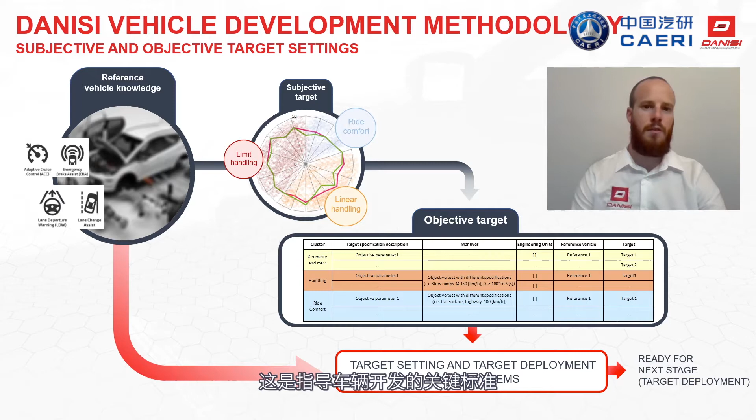A fundamental role is played by our innovative blending methodology. We consider this methodology to be a step forward compared to traditional approaches to simulation and virtual models. In fact, in the past, vehicle models were usually created only after the availability of new vehicle prototypes, leading to the creation of a so-called digital twin. As a consequence, simulation played a very marginal role, especially in the definition of the first prototypes and on very important architectural choices which are usually made very early in the project.

In Danisi Engineering, we worked on our methodology and know-how really in order to be able to build a reliable vehicle model in advance, even during the first prototype design phase. We call this vehicle model a virtual prototype. We can say that in this way, simulation becomes a part of a blending methodology in which all the main parts of our engineering process, you can see summarized in the circle here in the slide, are blended together in order to create prototypes with a higher level of significance.

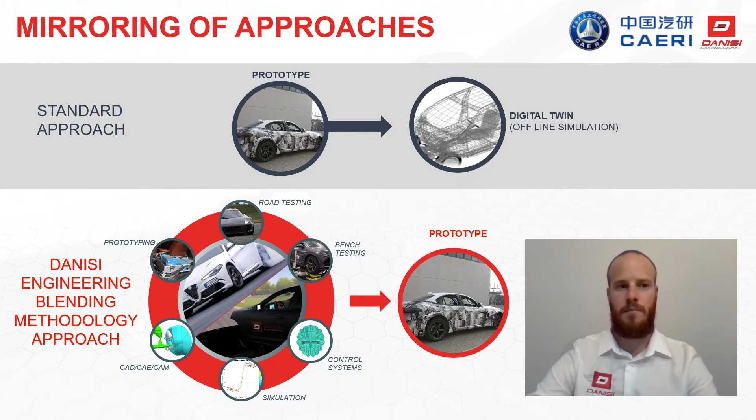The key idea behind this approach is to anticipate part of the development of the new car using simulation and its integration with our other engineering areas. In this way, the prototypes and road testing activities are reduced and especially focused on higher quality activities. This helps in reducing times, cost, and of course at the end obtaining better cars. The availability of a reliable virtual prototype from early stage allows us to focus on subjective and objective targets since the beginning of a project.

Here you can see our development loop in which there is a strong interaction between different engineering areas and all the main vehicle suspension characteristics and vehicle characteristics are integrated into the vehicle model. This allows us to check the target achievement for both objective and subjective parts. A development loop is then required until the targets are achieved.

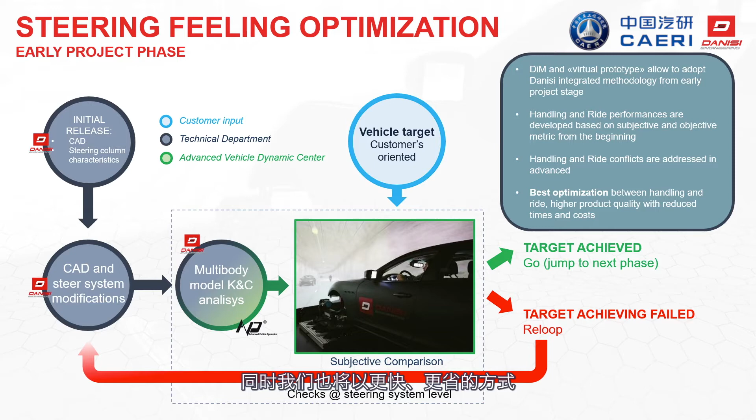And the benefit from this kind of approach is that the vehicle and systems design is driven by vehicle targets since the beginning of the project. Handling and ride conflicts are also addressed really in advance, leading to the best possible optimization between them. At the end, we will have a final vehicle with higher quality and also reduced time and costs.

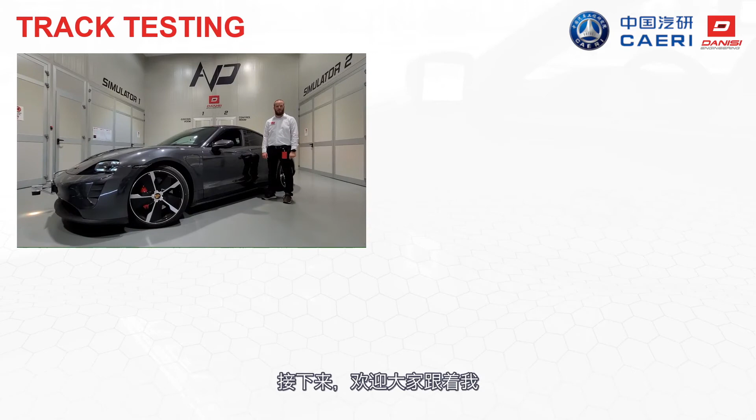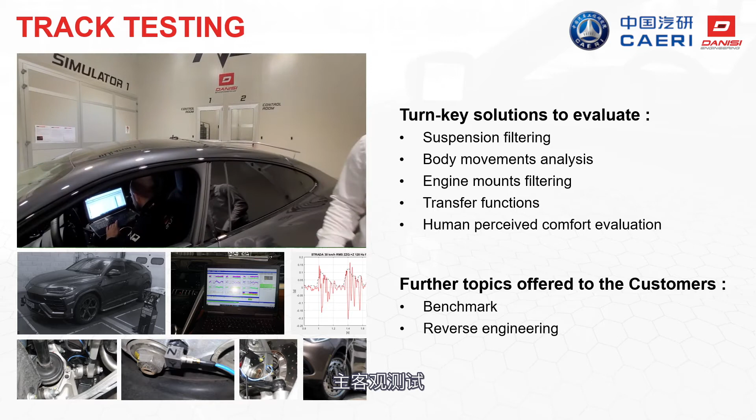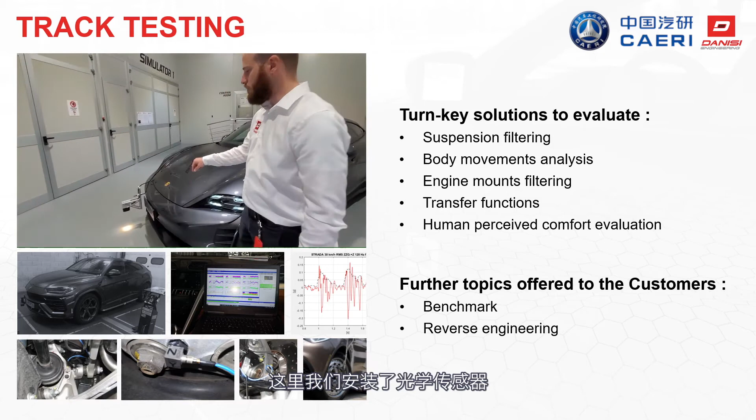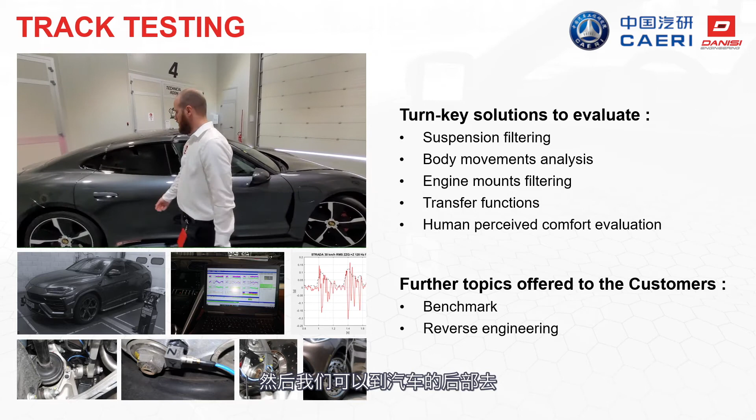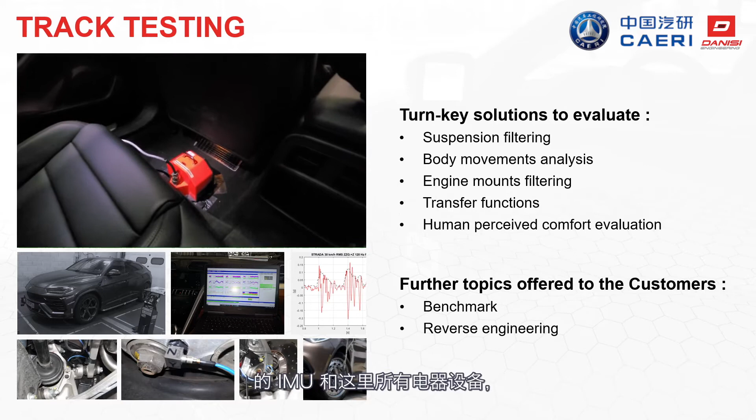Starting from the front of the car, in which we have this optical sensor that is used for measuring side slip angle and vehicle velocities. And then we can go in the back of the car. Here we have the other important pieces of the instrumentation. For example, there you can see an IMU, which is used for accelerations and rotational velocity measurement. And here all the electronics that help us to log all the required channels.

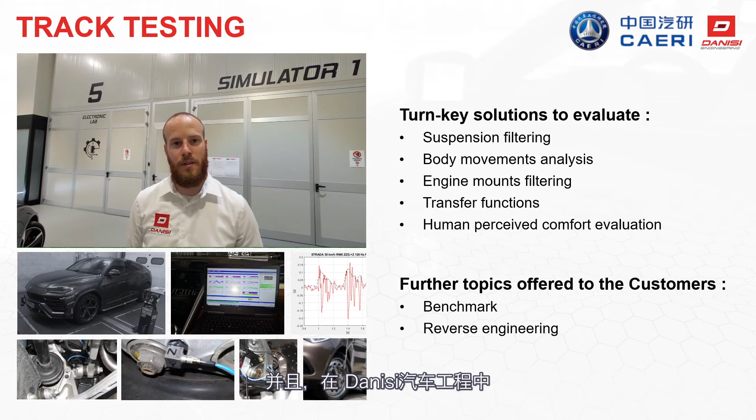The same road testing team is also working on the ride side. So we have a similar sort of instrumentation for measuring all the required channels for objective ride analysis. And also we have the expertise for subjective ride evaluations. In Danisi Engineering, we do ride comfort evaluation using also simulations and driving simulators.

For a trustable result in this topic, we focus on two main pillars that I will illustrate in the following. The first one is related to valid simulation results that are obtained first of all using trustable vehicle models. And in Danisi Engineering, we use a variety of vehicle models, starting from the first model in early project phase to the most advanced ones, like multi-body models.

We also validate the vehicle models both for handling and ride comfort evaluation, which is of course really important. Another important aspect is related to the tire model, that for ride simulations is especially important. And the tire model should be accurate for this kind of evaluation. A simple handling tire model is not enough.

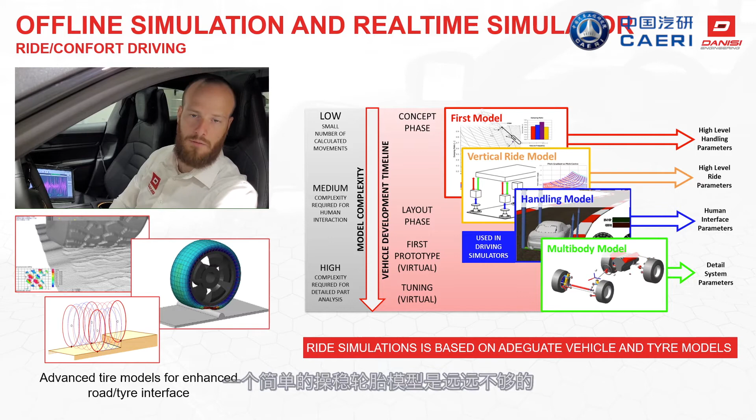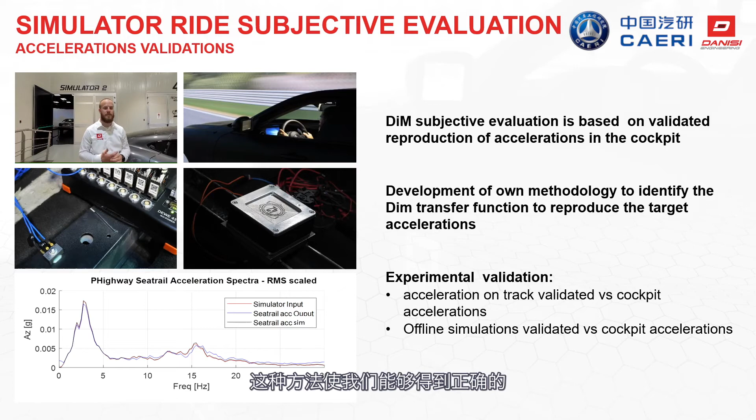The other important pillar for ride simulation is to have validated acceleration on the cockpit of the driving simulator. In Danisi Engineering, we developed a methodology for reaching such a goal. As you can see from the pictures here, we conducted a measurement campaign in which we mounted accelerometers on specific points of the cockpit. Then, thanks to our methodology, we validated the accelerations in these points against simulation results and track measurements. This methodology allows us to compensate for the DIM and cockpit transfer function.

When dealing with subjective handling evaluation on a driving simulator, our attention goes to making sure that the dynamic simulator reproduces in the, let's say, best possible way the vehicle dynamics. We achieve this goal by using a strong approach to motion cueing tuning. The motion cueing, in a dynamic simulator, is the algorithm that controls the motion of the dynamic platform as a function of the simulated motion of the vehicle model.

Here in Danisi Engineering, since the installation of our team in 2016, we worked on building an approach that gave us comparable subjective evaluation for the same vehicle, both driven on the simulator and in the physical world. We validated this method on several vehicles, of which we had both the physical car and the virtual model. Thanks to this approach, we are now able to apply our motion cueing tuning process very early, even before the start of the physical prototype design phase, ensuring in this way that subjective evaluations on the DIM of virtual mules are trustworthy.

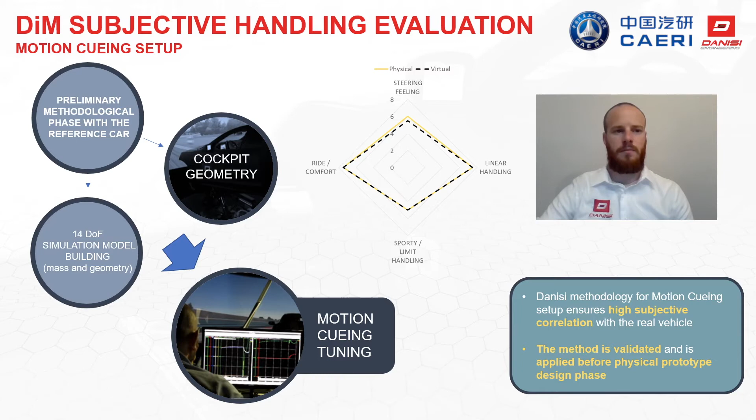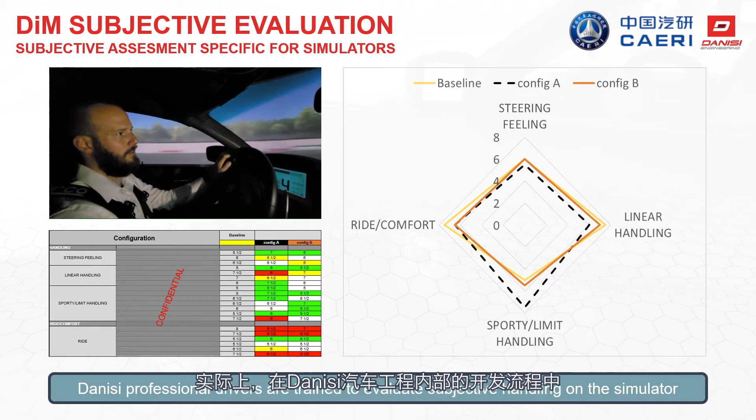The other important point when dealing with subjective feeling on driving simulators is the driver itself. In fact, the approach should be a little bit different compared to physical world testing. In Danisi Engineering, we developed a standard approach for the so-called adaptation phase. This makes us sure that the subjective evaluation that our professional drivers give us on the driving simulators is correlated to the one that they give in physical world testing. We also suggest this adaptation phase to all new customer drivers that are coming to visit us here in AVD Center.

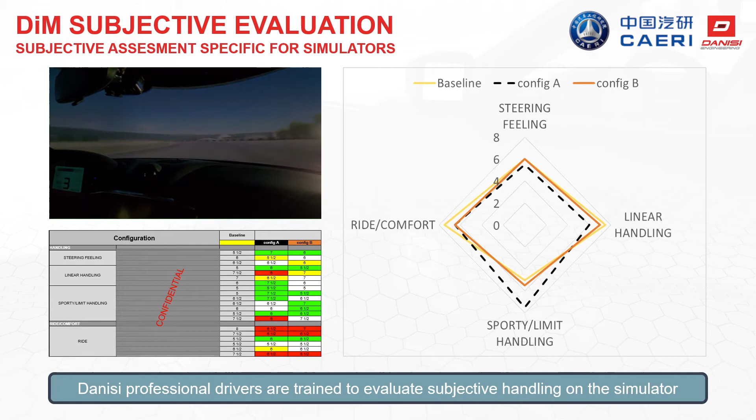We will now see some examples of our methodology applied to some case studies. The first one regards the optimization of ride and handling characteristics on a hypercar. In this case, we applied our development loop for defining the spring stiffness values. We started from a benchmarking activity for the first definition of the natural frequencies, and then we checked how our first hypothesis was impacting objective and subjective targets, both for ride and handling characteristics.

Actually, we found out that the values of natural frequency that we set at the beginning of the project were creating some problems on the handling side. So we had to do several loops of optimization looking for the best compromise between ride and handling. This optimization process has been possible only with this integrated approach using simulation.

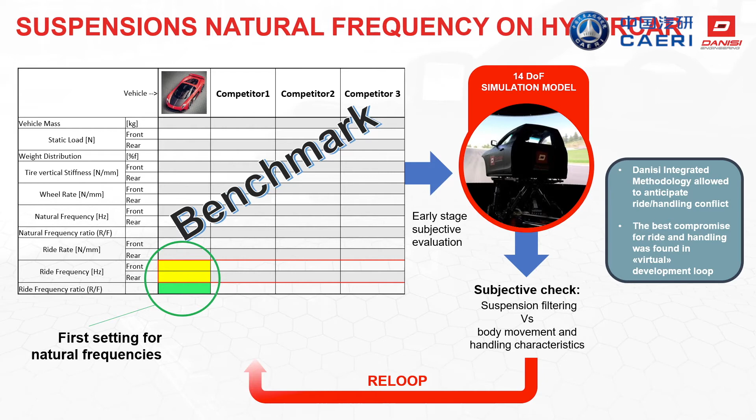Using our methodology, we have been able to perform failure mode analysis on the steering systems using our static simulator and steering bench. The steering mechanical systems and control logics were integrated into the simulation loop using hardware in the loop. We also used our HiLDyS bench, which allows us to have the real steering systems in the simulation loop. This setup, together with our methodology for simulation, allowed us to perform this safety test before the first prototype was built.

In this case, we connected the ECU of the steering system and we injected some faults which led to abnormal values of steering torque. The reaction of the vehicle was then assessed by a professional driver in order to evaluate if it was still safe enough, even when a failure or a fault occurs.

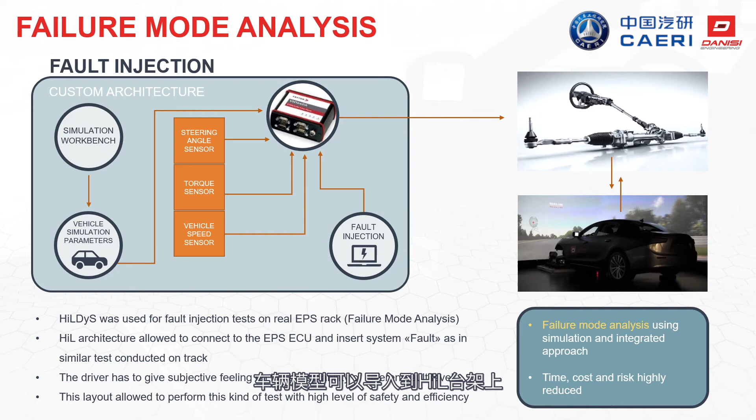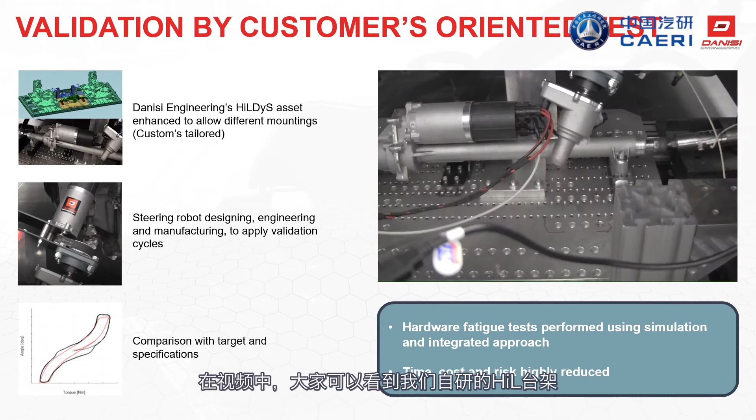The same approach was previously validated using an existing vehicle, giving us confidence on the subjective results obtained in simulation. For the same steering system, we perform mechanical validation tests using simulation and hardware in the loop. In the video, you can see our HiLDyS bench that was invented and produced by us.

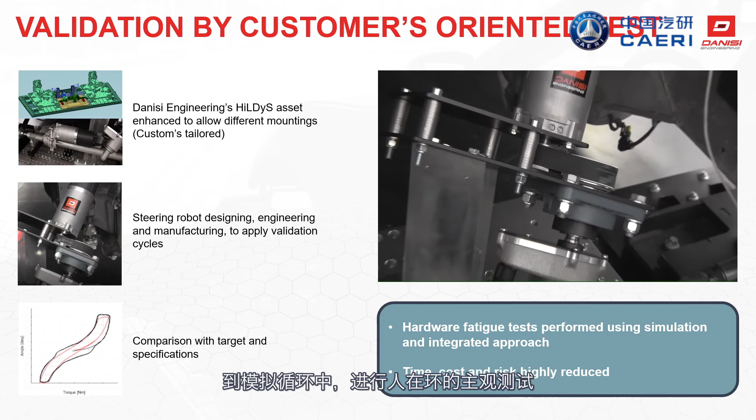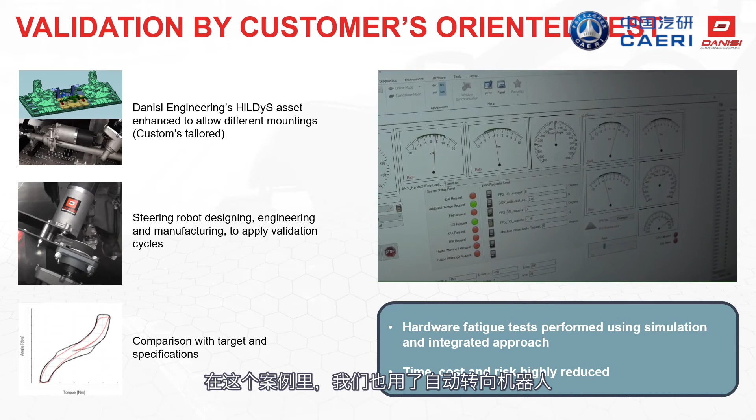This HiLDyS bench allows to integrate the complete real steering system in the simulation loop, also for driver in the loop activities. This is something quite unique in this simulation world. In this case, we use the bench for a series of automated tests meant to validate mechanical performances of the steering system. We also created a steering robot that moves the steering rack in accordance to the test case.

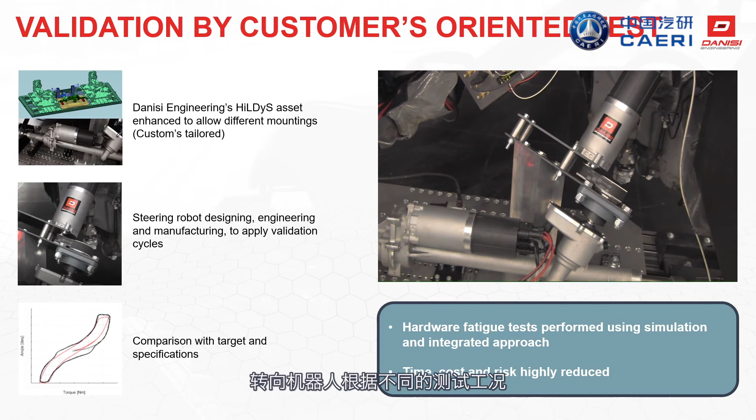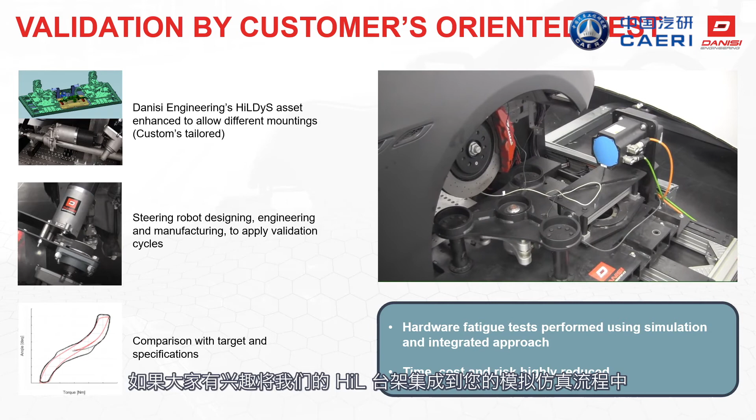The sensors in the HiLDyS bench were then used for measuring loads on the rack. If you're interested in integrating HiLDyS into your simulation loop, we are of course happy to help you.

This effect is very common nowadays because it perfectly fits on hybrid and electric vehicles, which may have independent control of a torque on a single wheel. In Danisi Engineering, we developed a torque vectoring control system, and we applied it to a hypercar with two independent motors on the front axle.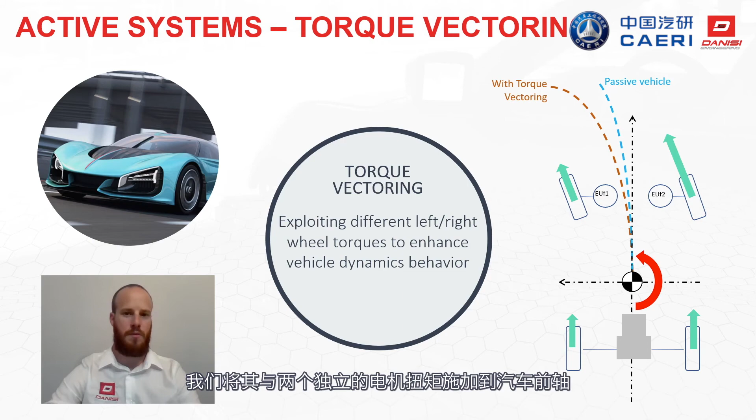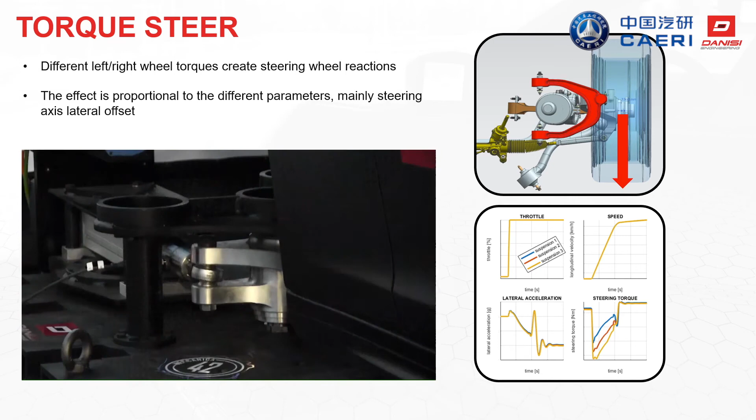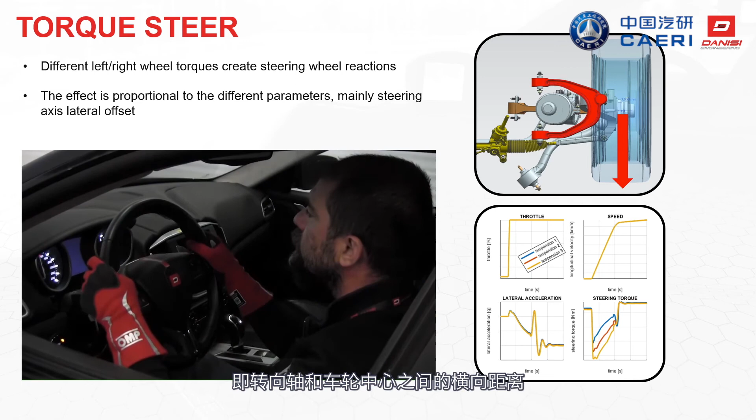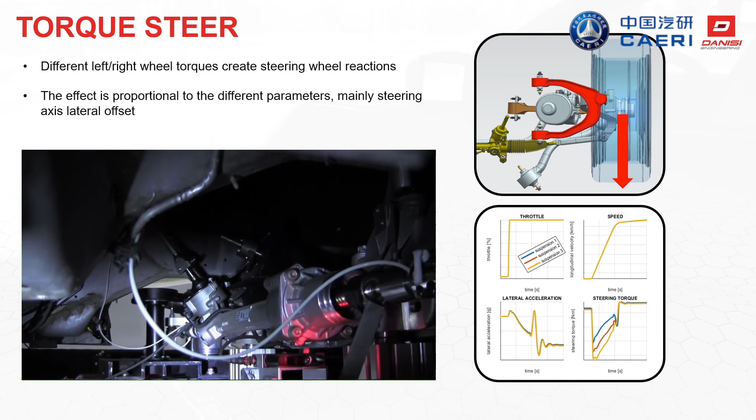Unfortunately, the same principle which is behind the torque vectoring effect can create some undesired effect in some conditions. In fact, having different left-right torques on the front axle may create steering wheel torque reactions and steering torque perturbances. This is called torque steer. This effect is influenced mainly by a suspension metric, the lateral distance between the steering axis and the wheel center, the so-called hub offset. The higher the hub offset is, the more likely the torque steer is.

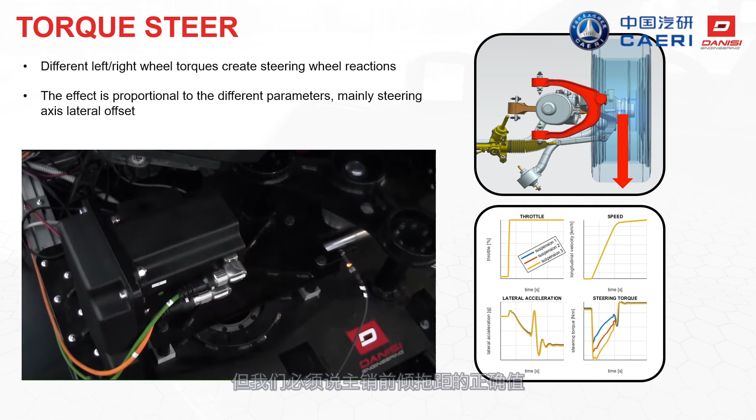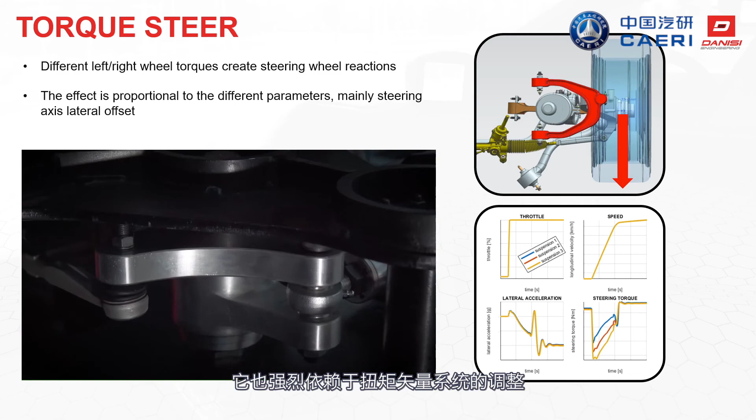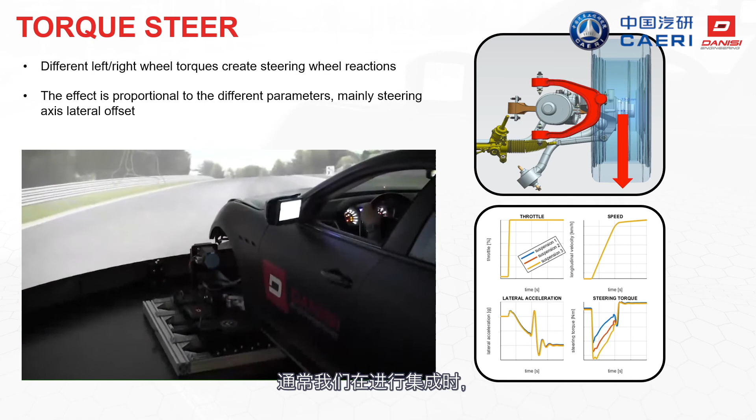But we have to say that the correct value of hub offset is a sort of trade-off with other suspension characteristics, and it's also strongly depending on the tuning of the torque vectoring systems. Usually higher control performances create higher torque steer effects. When we approached the integration of our torque vectoring control for this vehicle, we had to understand from the beginning which was the target value of hub offset in order to reach the best compromise between torque vectoring performances and acceptably low steering torque effects.

We started by tuning the torque vectoring system on our simulator in order to reach our targets that we set at the beginning of the project. Then we made some loops of optimization of the suspension design in which we changed the hub offset value until our professional drivers evaluated that the torque steer was acceptably low. In this way, we found the target value of the hub offset. Without this approach, it would have been impossible to design the suspension in the correct way since the beginning, leading to a series of compromises on performances.

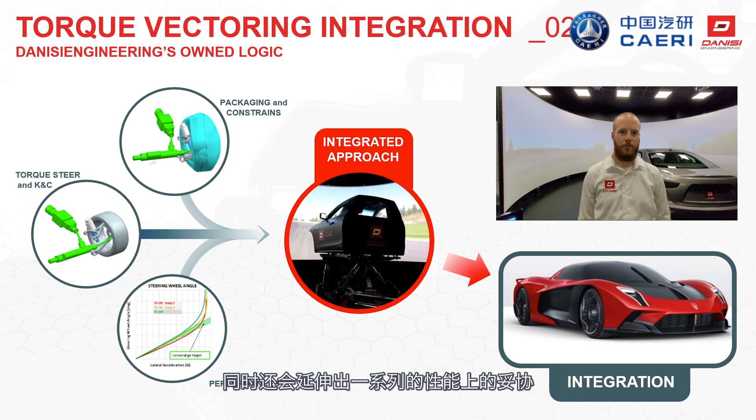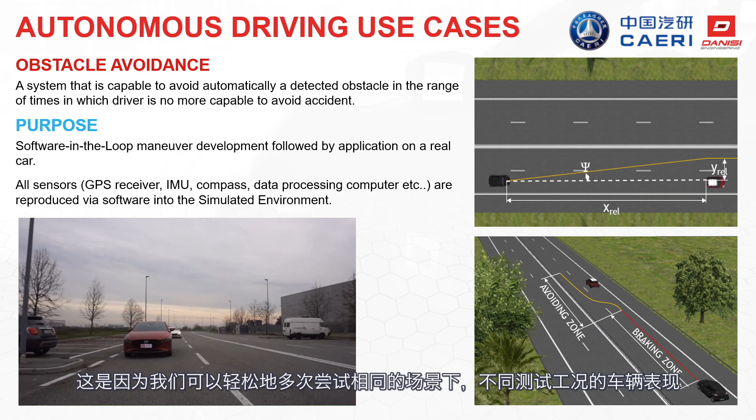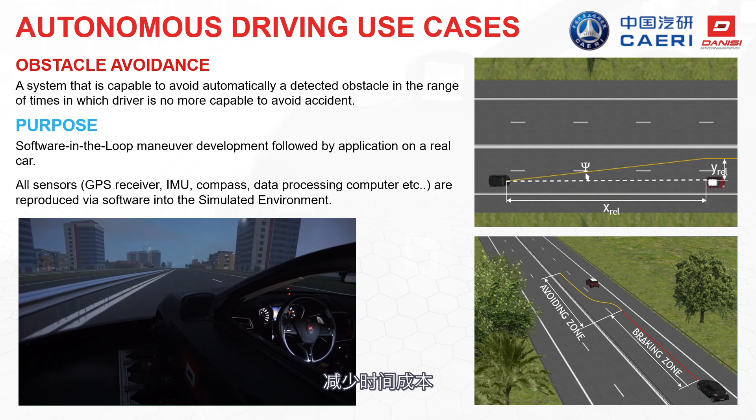Once the simulated scenario is created, the development process of ADAS and autonomous driving systems is sped up, since we can easily try several times the same scenario in a very repeatable way, something which is not possible in the real world. This is really helping in reducing physical testing with a strong reduction on times and costs.

We reached the conclusions of this presentation, and we saw that thanks to our strong methodological approach, we are able to integrate simulation and other engineering processes since very early phases of the project. This is all aimed to reduce time and cost spent in physical testing, but focusing on higher quality activities. We can say at the end that our approach to ride and handling development is based on the combination of simulation and prototyping, leading to the so-called simulotyping.